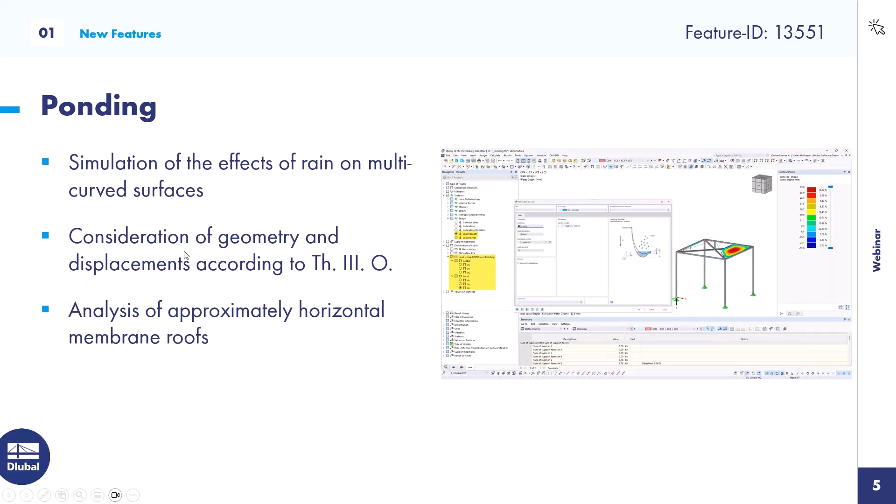It's of course an imaginary example. I did not pay a lot of attention to define the correct member hinges or the correct stiffnesses of this construct. It's a small tent, 3 by 3 meters, and it was standing in my garden.

I purchased something like this from a normal online seller. Since it's better to sit under it if it's raining, I let it stand in my garden. Unluckily this year there was a bigger storm and more rain. Once I came back from my weekend vacation traveling, I found that my tent was destroyed because there was a big water accumulation in my membrane due to the heavy rain and wind.

So it did accumulate. One bar bent horizontal because there was just weak stiffness. I'm currently trying to fix it, maybe next year I can use it again.

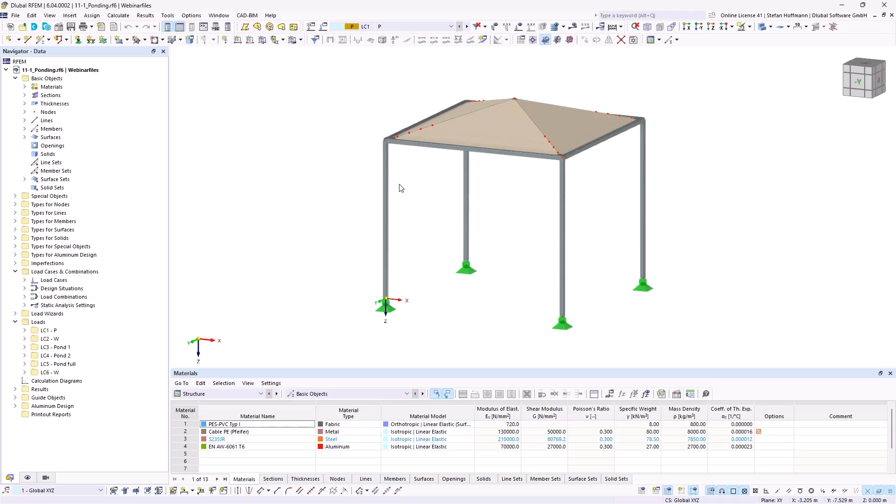So let me introduce you to my example. As told, it's just a small tent with aluminum profiles. Then we have a normal membrane put on the roof as triangles, so four triangles, and I summed them up as a surface set. You just have to mark them and combine them into a surface set, because this allows you to load it quite easily.

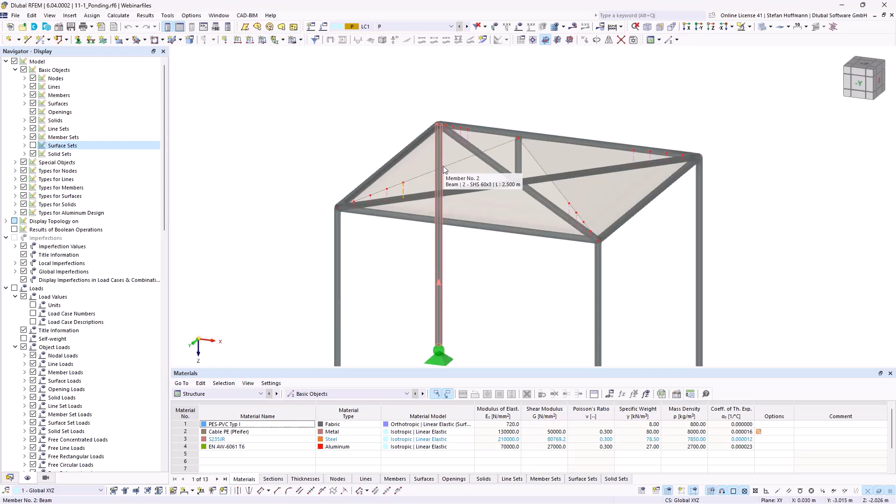If I make it a bit visible, you can see there's an inner cross in the plane and some columns over here where the membranes lay in. I tried to couple my membranes, as you can maybe see, with some rigid members, where I gave them some nonlinearity, because if elements are not connected with our FE mesh, there's no check if the membrane will deform below the member so that they touch and distribute forces into each other.

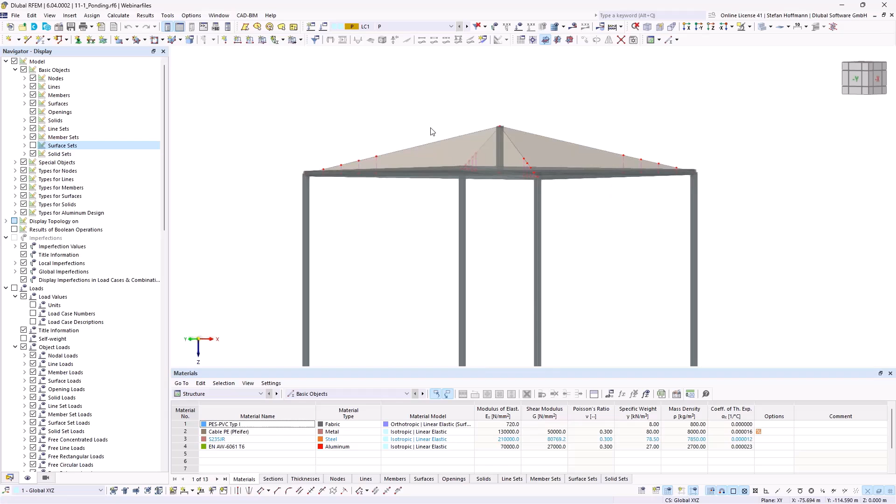I'm just putting a normal pre-stress on my membrane. I use the projection method because I want to reach such a tent shape, so I enter some imaginary values. They may not be practical values, but the pre-stress will not be that high, because usually you will also have some cables tensioning this small tent.

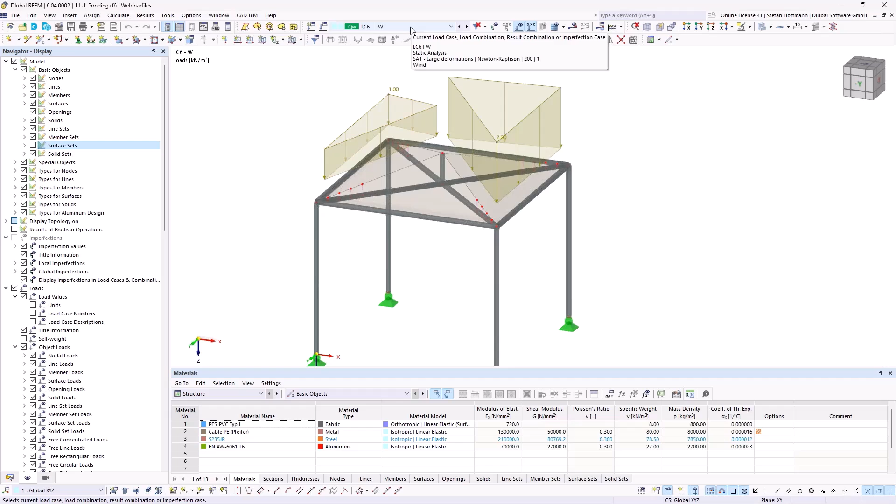And then I will load my tent once with such an imaginary wind load, so a high load on one side, a quarter on the other side, and also a high load on this side, and just a half normal pressure on my surface on this side. So that's the system, and then we now come to the feature load.

So it's a normal surface set or a normal surface load from the load type ponding. If you are searching for the load, just create some membrane structure or some normal structure, check out for a surface load, and then you will find the ponding load.

The ponding load allows you to define a specific weight of, let's call it material, or as you can see in the sketch, rain falling on your structure. You can choose that it will be filled fully if you do not define an amount of precipitation, or you can define an amount of precipitation.

Then the iterative calculation will stop once the defined amount has rained on the area. It is necessary to do a calculation of theory third order.

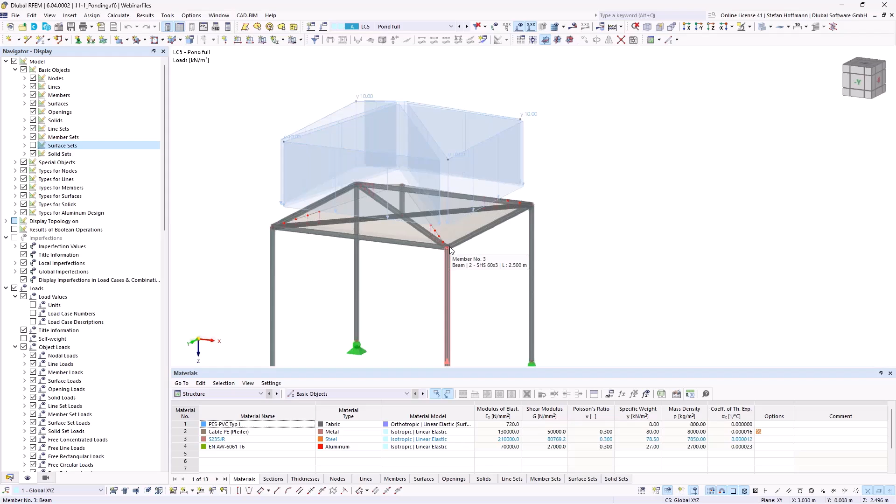So my first load case will be 1 millimeter per square meter, then the double amount, 2 millimeters. And then I would, of course, like to check what will happen if it is raining very much. This will be some state of equilibrium when the water fully fills my membrane, and then the water will flow down because the surface is fully filled with water, and there will be some low point where the water can drop down.

Okay, so I did sum up everything in load combinations. Maybe you are already used to our add-on, but it is now not the case that you have only one initial state, like in RFEM5, where you were able to define some form-finding shapes by defining loads and pre-stresses. You are now fully free in one RFEM file to check what different form-finding states may bring you in your structure. So for my example, in the first case, I want to pre-stress my membrane.

Also, as you can see in the load case with the activated dead load material, I did deactivate my rigid members because the shape should be found, and I expect that the membrane will not lay down on the members without these links, and later I will use these links. So I use my initial state, and I assign the pre-stress, of course, and wind load number 1. This is CO1, and in CO5, I use the other wind load. So CO1 and CO5 are my initial form-finding states, and then I load the states with the 1 millimeter, 2 millimeter, and full load. So the same for the other stuff, and I then considered my load combination as initial state.

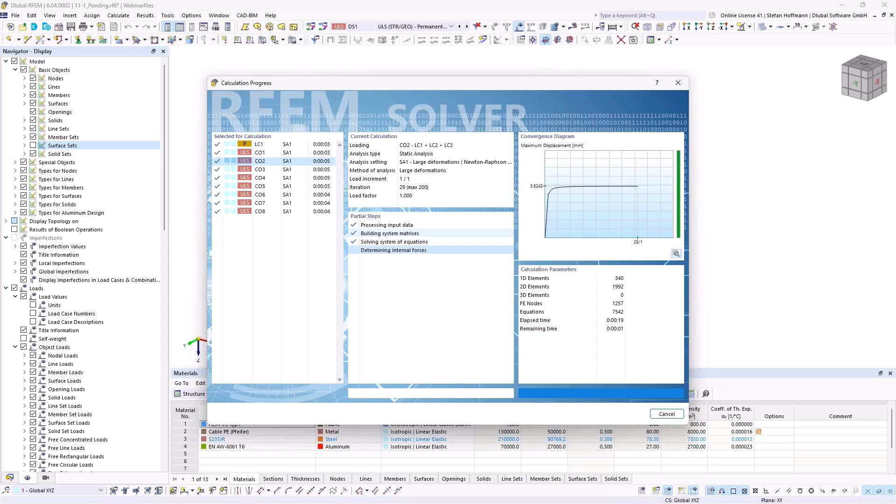So if I now calculate our design situation 1, which is most likely the new type of envelope, which sums up all our load combinations, you do not need to define an envelope by your own. It will start, of course, with our first initial state. Then it will load CO1 and 5 with our wind load additionally. And then it goes into the multi-core calculation because now the stiffness matrices are the same, and it will check up all the other combinations.

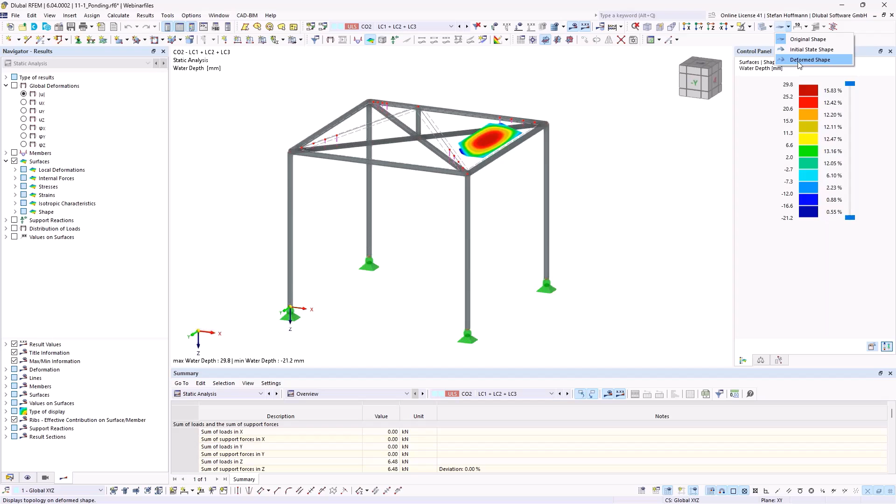So first, we want to check our wind load like this and the amount of rain like 1 millimeter. I will hide the forces. Then you can, of course, always think about which type of topology you want your structure to be shown. So I would like to have the deformed state. And of course, I would like to start with the initial state, where we do not have yet some raining. So I would just check for the contour lines.

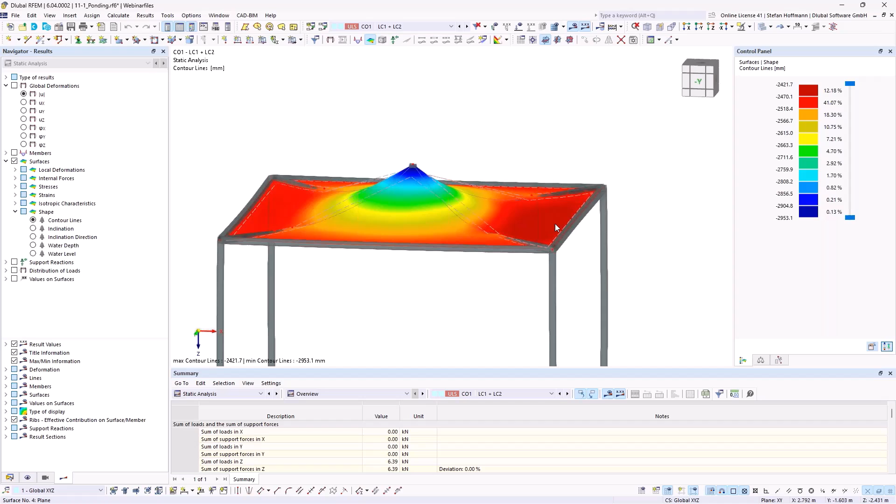So it's the pre-stress I put in my structure. And then there is the, let's call it, heavy vertical load. And as you can see, my membrane will, due to the effect that the load is higher than my pre-stress, bend down. And the highest point of my members is 2.50 meters, and my membrane will be like 8 centimeters below this point.

So this is most likely the lowest point, an available point for water to accumulate. So if now the rain comes on my structure, nothing really changes. But if you now check for our water depth or water level, you can see that there is some water accumulating. Let's check from minus y. So it's not fully filled because 1 millimeter will not fully fill the square meter we have. And you can as well, of course, inspect the forces.

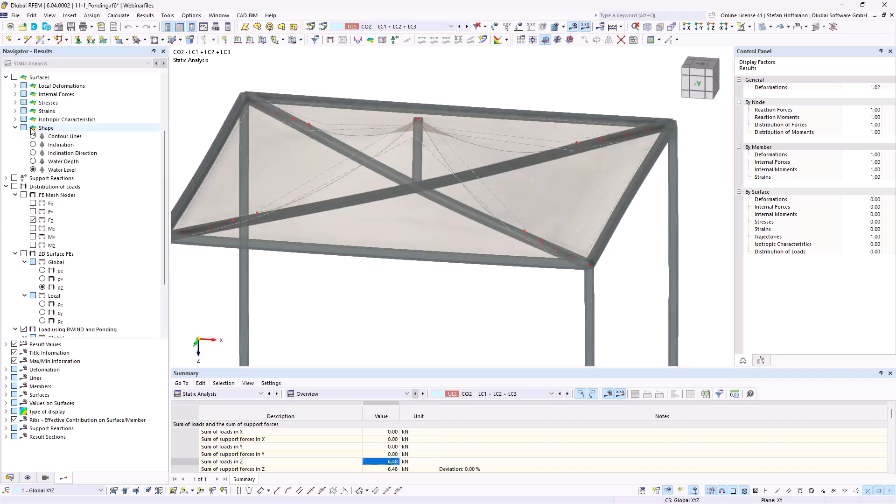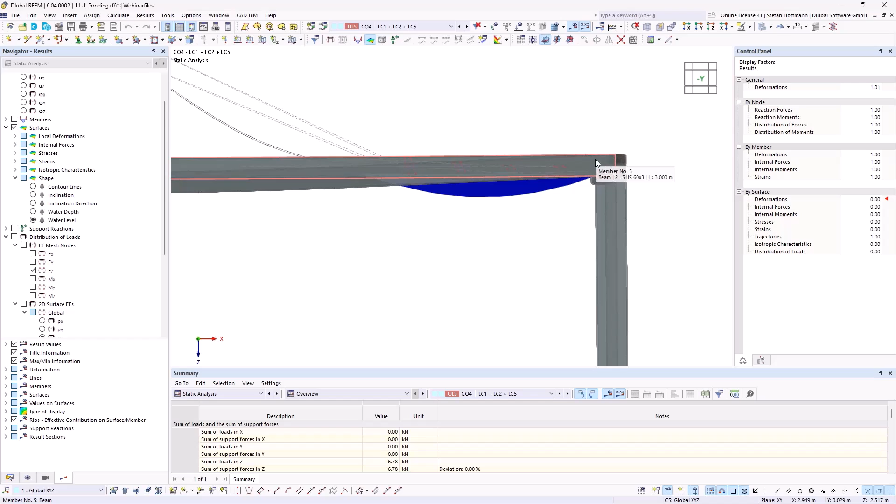As shortly shown, you can also check the distribution of loads and the ponding loads distributed on this area. So my water now flows into my surface set, and if I increase the precipitation, switching to the next combination, you can see that it will accumulate even more. And last but not least, it will even fully fill my hole, and I will then receive a final result. It will not influence the membrane with its stiffness and pre-stress more, because it will afterwards just drop down at the edge, as you can see over here, where the member is a 1D element, so it will not take into account the height of the member.

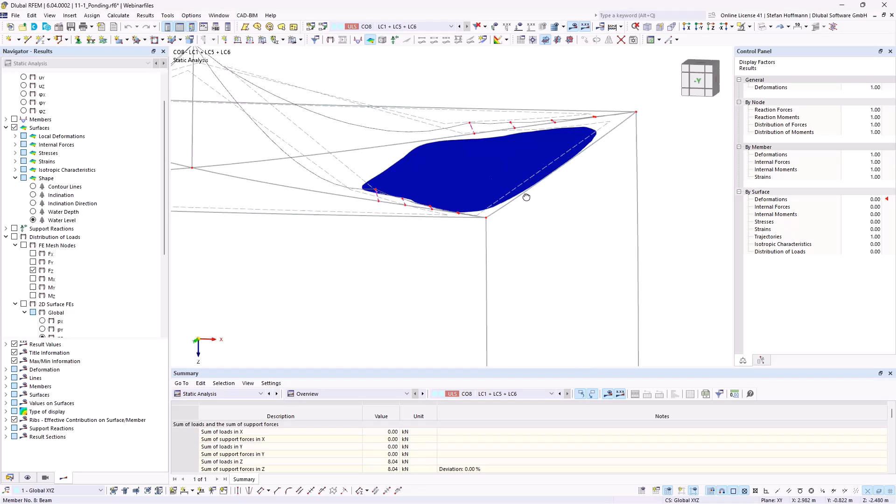That's not possible in a 1D, but it will now flow down, and this is then the state of equilibrium. So the same would go if I load a higher wind load on the left, so you can see it accumulates on one area and then on the next area. And last but not least, it will accumulate even more in two parts of my structure. So this way I could maybe check if the rain will affect my construction, and if it's weak enough, we can see that the members will bend like this, and well, my tent got destroyed because it was just weak in this direction, and now I need to fix it.

I do have a second, let's call it simpler file. So let's open the second file. It's as well, once again, a more imaginary structure. It's just a membrane which gets pre-stressed with its dead load in a horizontal way.

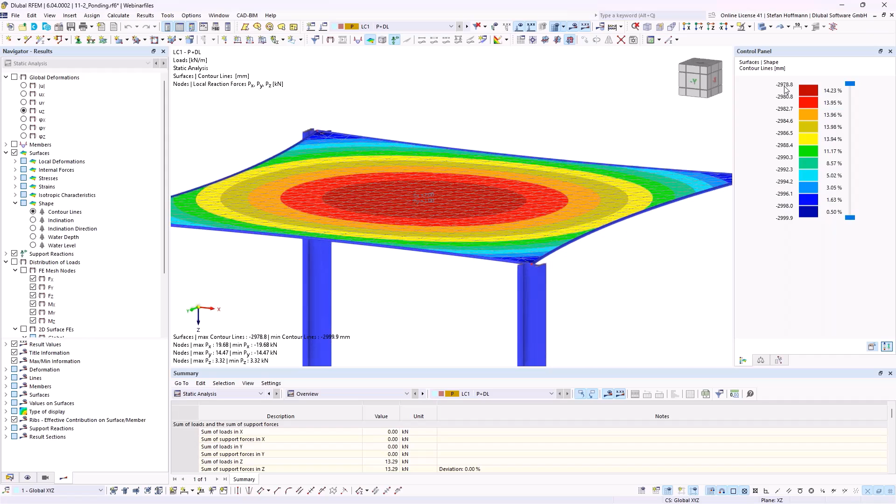Due to the minimum dead load, there will be some starting shape, which you can check with the contour lines. This is a 3-meter member height, and we have about 2 centimeters of deflection already into the Z direction. Now if it rains, I've chosen 1 times 10 millimeters, 50 and a bit more, so the full way. You can see it better because it's an easy structure to observe how the rain will fill your construction.

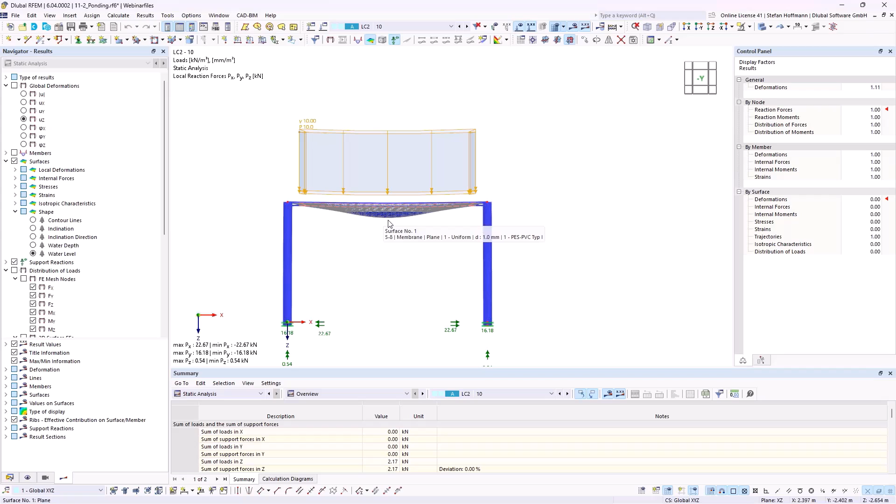If we check for 10 millimeters and the water depth, you can see this area is influenced. And if we check for the water level, you can see that compared to the initial state, the membrane will bend more because we now have the pre-stress brought into the system plus additional loads, and it will be filled. If we have higher ponding, it will be filled even more. And at maximum ponding, there is an equilibrium where, because it's an orthotropic membrane, we reach the lowest point where the rain will just drop down and fall off.

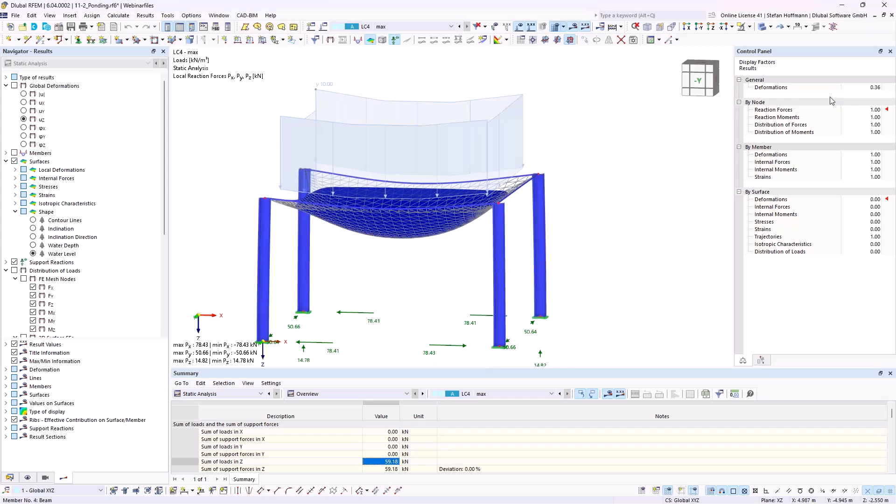Okay, so that's the ponding feature. I'll step to the next feature, which is currently only available in pre-release mode. This is for our internal testing, but pre-release means it's going to be published soon in Grandmaster. You can check for it in the extranet.

It's the surface load sag form-finding load, calculation method projection. Maybe you attended my latest webinar where we checked cushions. There we showed the surface load sag for the standard method, and now we've filled the gap and are also going to introduce the surface load sag for the projection method.

So the definition is sag, meaning you only have to define a ratio of your inner forces and a sag of a bending height. Then the iterative method will find the concerning equivalent pre-stress loads for the surface. It offers orthogonal or radial distribution.

And because projection is usually, as you've seen in my latest example, meant for a tent structure, this is now meant for simplistic shapes. Okay, let's jump into the pre-release. Remember, these files will not be able to be opened with the load type in your normal customer version because it's not yet released.

So we have 2 quite easy membrane structures because we only want to discover the acting of the membrane, and we don't care about the stiffness of the construction under it. On the left side, we have the normal standard calculation method sag definition. So to reintroduce you, it's once again a load type as a depending load.

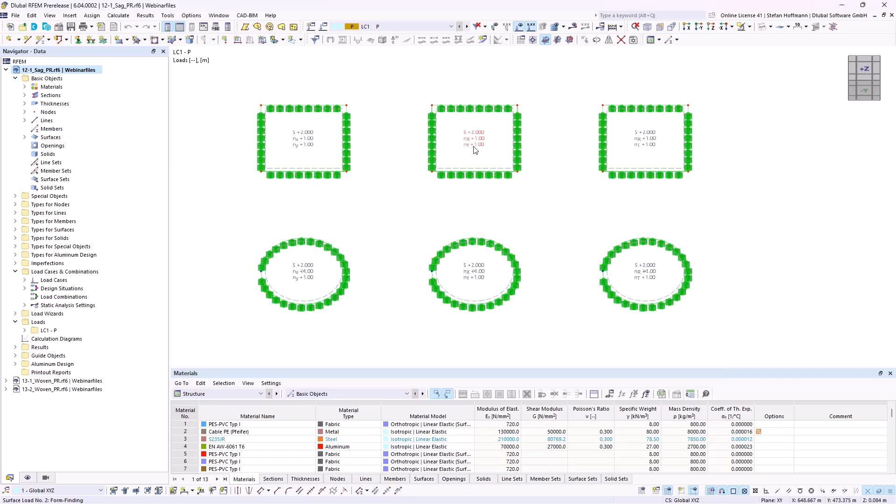And on the bottom, for the circle, I have the same definitions. In the middle, you can see the projection with the same input for the orthogonal load distribution, and on the right side, for the radial load distribution.

If we now run this pre-stress load case, it will do a large deformation analysis. It will iterate until we reach a certain point of convergence. If you hit this button, you can go into the static analysis settings and find the tab form finding, where you'll find information on how many iterations you want for this pre-stress, depending on the structure and what you want to reach. You can also affect the precision or tolerances for your calculation.

So if I don't show the results and just look at the mesh from the top - remember, the left is the standard and the right is the projection method - this is, I think, the easiest way to evaluate what both calculations will do to the membrane.

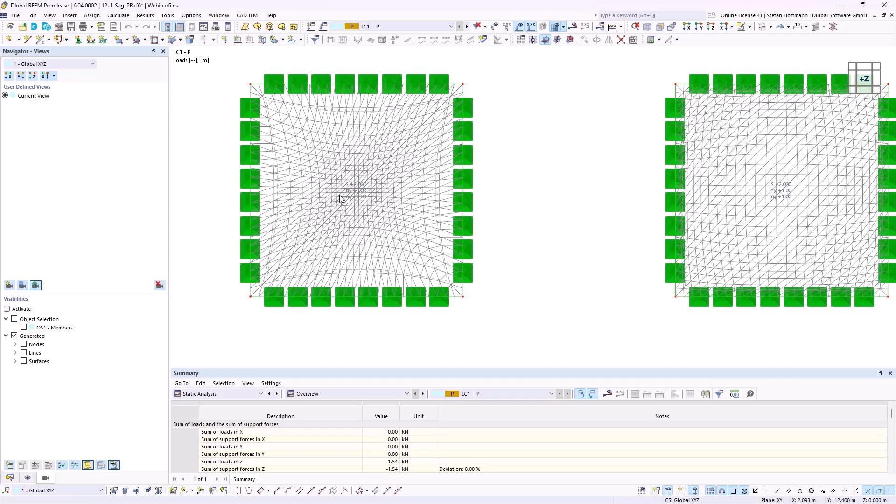You can see that in the standard sag, we have a fine mesh in the middle, from the deformation of the mesh elements caused by the calculation. For the projection load, we have a quite stable net. So it does something with our calculation.

If we check the shape, so the contour lines of the membrane, you can see they are most likely similar. We quite reached our goal of 2 meters - we now have 2 meters and 3 centimeters. We may still change the convergence to reach exactly 2 meters if we want, but this result is feasible for me.

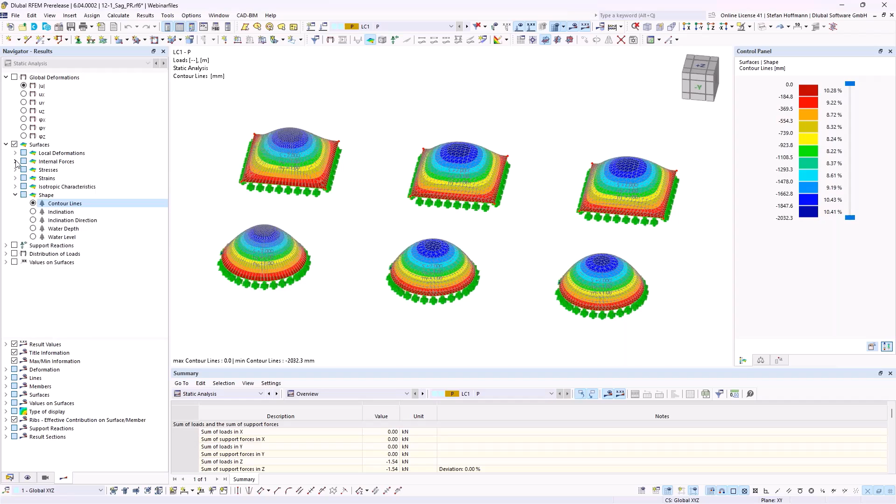We can see on the left and right that it's most likely a similar shape, though you can see we have a bigger circle with the standard method. But the easiest way to check is to look at the internal forces of the surface, so let's check for X and Y. This is the ratio the program will find for the pre-stress we put inside.

And if you check the principal internal forces, these alpha M values, this gives you the trajectories of how the forces will be applied to the structure. You can see this is a bit smoother distribution of the surface load. So it's most likely up to you which method you prefer to get your shape and the pre-stress into the structure.

Let's go on with the last feature for today. It's also still in pre-release mode - a new material model we are going to introduce to you: the orthotropic fabric nonlinear elastic surface material model. It's available for materials of the fabric type. Since it's nonlinear, it's going to require the nonlinear add-on later on. It offers the orthotropic nonlinear elastic behavior of your membrane material.

This is meant mainly for two weave patterns. If your membrane has a plain weave, symbolized like this due to the production process, this model is going to represent it with an element in the background, or if it's a basket weave like this, there's also a representing element model in the background.

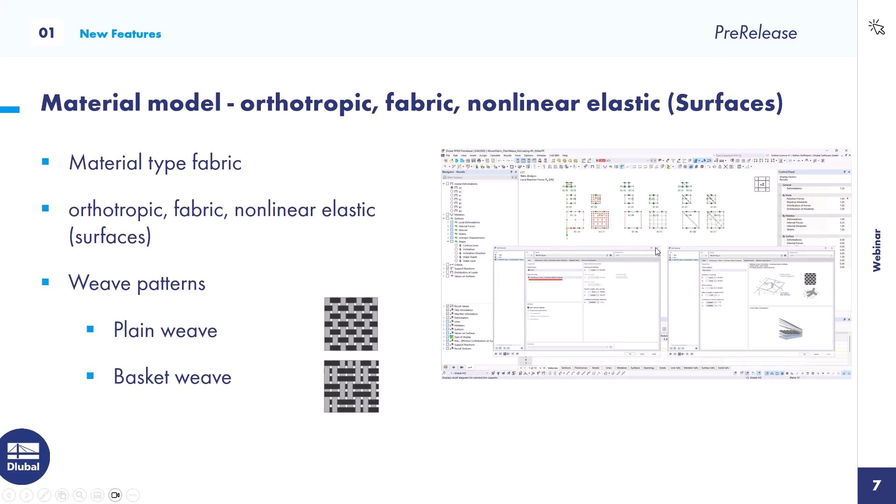Some more information on this material model: it is a microstructure-based material model, and in the background there is a representative volume element, as you can see in the sketch here. This is most likely modeled with inclined cables for the fibers due to the production process, since it is woven, and we have some vertical truss between those fibers.

If you also want to apply a 2D foil element as a coating, you will have the option to enter a shear modulus, as you can maybe see in the sketch. The sketches will be improved, of course, but it should be possible to introduce you to the model system.

So all you need to enter is, as always, the material properties for the orthotropic material. Then you only need to enter a ratio of the height to the length of the volume element. The height is the stitch between both fibers, and the length is one element - essentially one part of the weave.

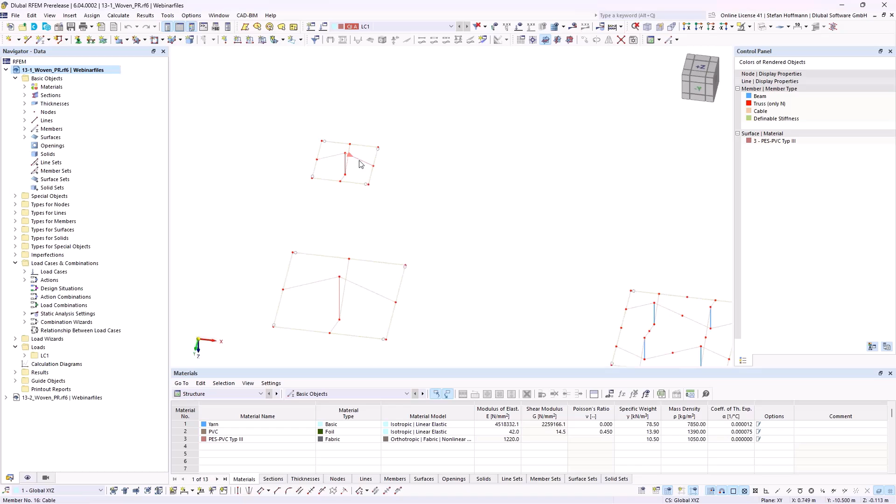Okay, let's step into the program and see some colored model shapes. First I want to show you this file made by our developers. On the left side is the RVE, the representative volume element, with cables, truss, and a coating if necessary - meant for different FE mesh sizes and also for the weave pattern we have.

Now you would go into your membrane, which is easier to define than defining such an element. You go into the material definition, into our library, choose a fabric material type, and once it is released you will be able to define an orthotropic fabric nonlinear elastic material model. If you don't care, you can uncheck the user-defined material and the preset is taken in the background - a coating and a ratio of the height - or you use your known material, which should usually be the case with a membrane material.

Then you will check the user-defined material, and you will be able to manipulate the E-modulus. You can define a coating if you want, and you can define a ratio for this.

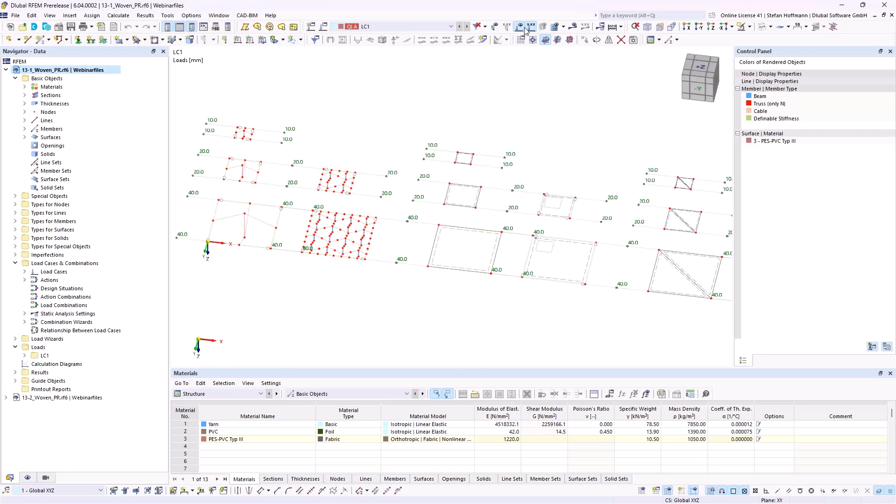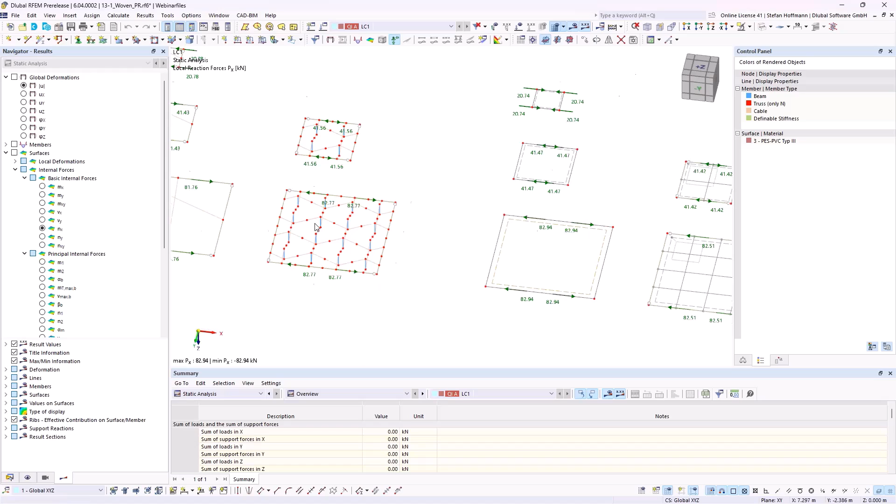So this one is an example to test if we now have support for movement, what results can be achieved with the nonlinear material model compared to the element in the background. It will not fully match, depending on the type of convergence where you set your equilibrium, but you can see in the support forces we are close to reasonable results, what we would expect by simulating such a weave pattern with such a member material model, or with our upcoming nonlinear material model.

Let's show you this on a simple membrane structure. I think the structure is already known if you attended a webinar of ours. It looks like a paper plane, supported by cables on the edge and nodal supports. Then there is a prestress we apply, just a normal symmetric prestress into local X and Y direction with the standard method, nothing special.

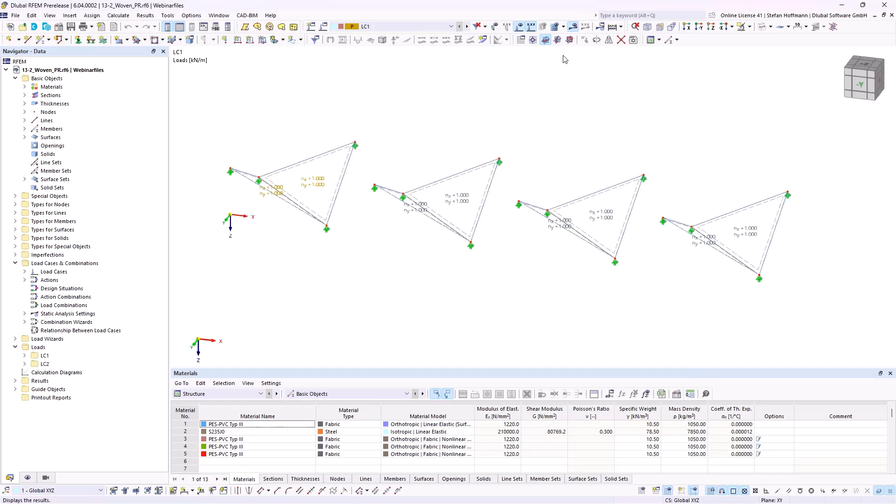We want to load it with a vertical load, because doing the prestress, the form finding for the structure, we most likely define the shape we want to reach with our inner forces. So the material properties will not play a big role, and we will receive a contour shape which is similar, even if we use different material models.

That's the point I have to tell you. So the left one is using the normal linear elastic material model for the membranes, and I have defined 3 different types. The next one is using nonlinear elastic, where I have defined the shear modulus to be the same as my linear one. If I check it, it's the same shear modulus.

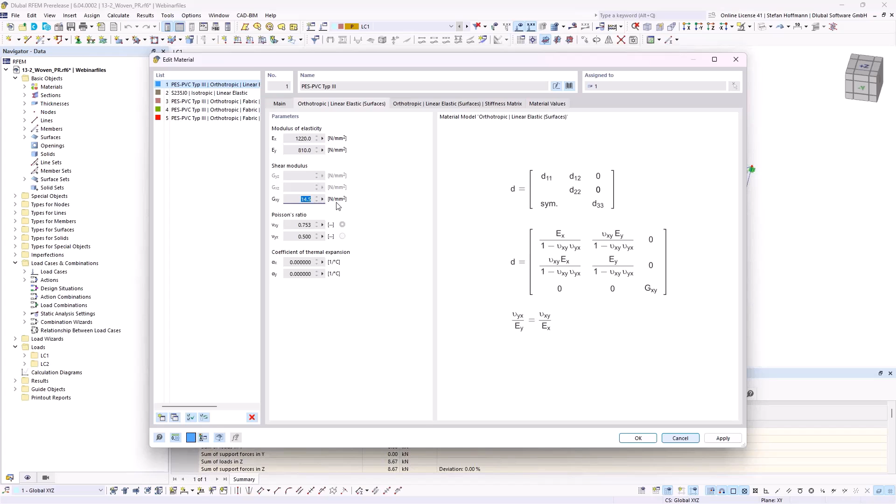Then I have defined one material model where I got rid of the coating, most likely - you can enter 0 here. And the last one will have an increased shear modulus, so a coating which is bigger or has a bigger influence on your fiber structure.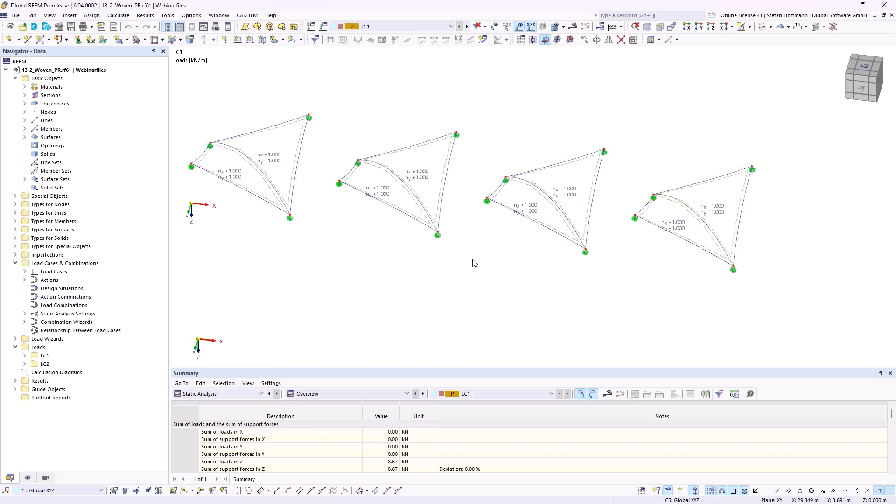But still, as told, we receive the same results for our form finding process because the boundary conditions are the same. And due to the fact that we define the prestress, we will receive the same shape in this state.

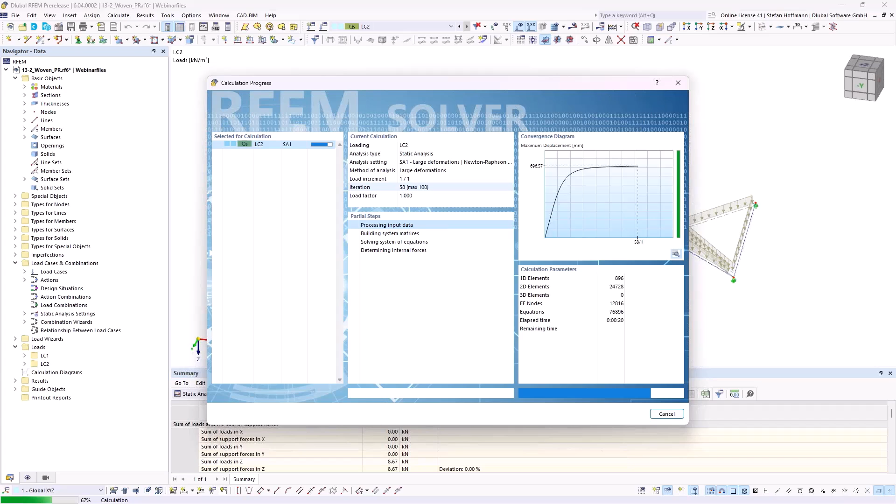If we now apply a load to our form-found structure, all the material properties and boundary conditions come into play. Even if you now would have members, the stiffness of the system will be given more attention than in the form finding process. Also the prestress will maybe redistribute if you use some form finding supports - I will show you soon how they are used. We will now see different results.

So we can directly see it. Maybe if we move it like this, let's do it with the cube. If we check our view from this angle, we can see this is our linear one, and then going to nonlinear, the deformation will already differ.

Since we have a quite high membrane, this is not the easiest way to elaborate, so let's check the inner forces of our membrane. We can see that the definition of the material will have a certain outcome for the inner surface forces, as well as for our boundary conditions.

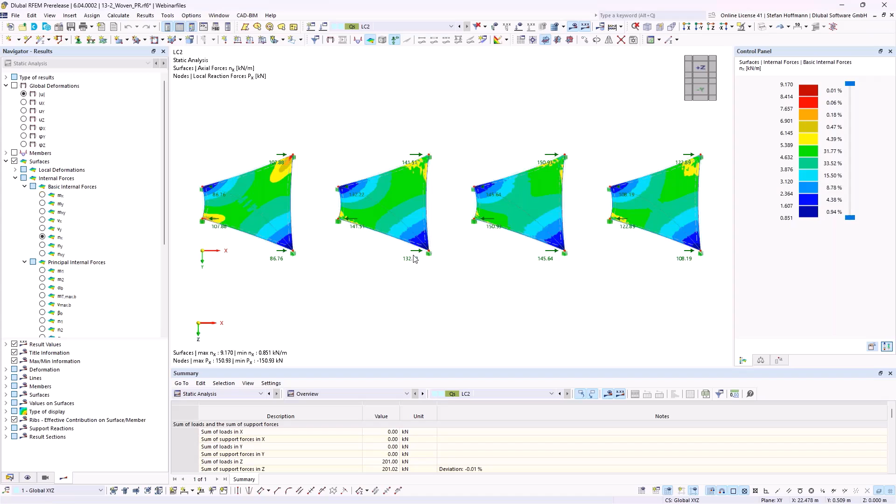Okay, so I will just close this one, and I will now come to the second part of my presentation. I would like to show you some certain examples of what I was thinking of.

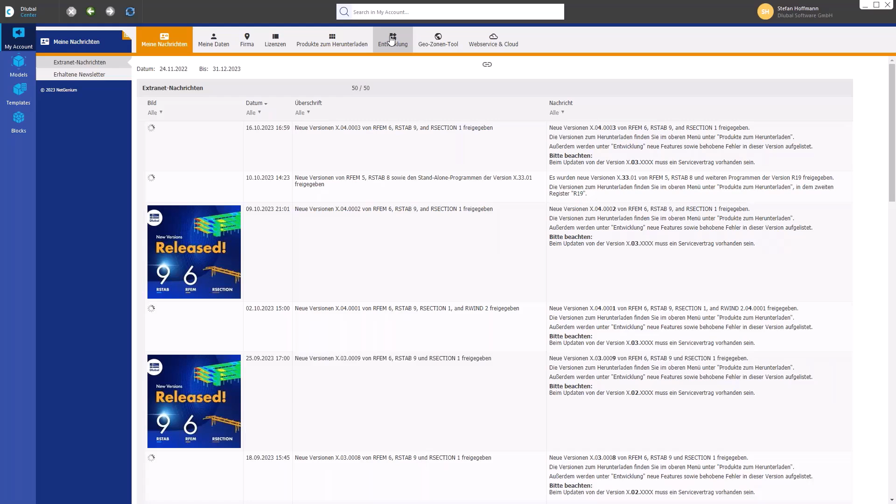I will start first with an easy cable. So I'm going to the Dlubal Center, and as you can see, if you already used the project manager in RFEM 5, you can quite easily filter your projects like this, which are on the normal local storage. You can also enter your account. Let me quickly show this and check - well, it's now the German interface because my account is a German account. Go into the development section, and this is the place where you can find features and also bugs if they are corrected. I will now load my next file.

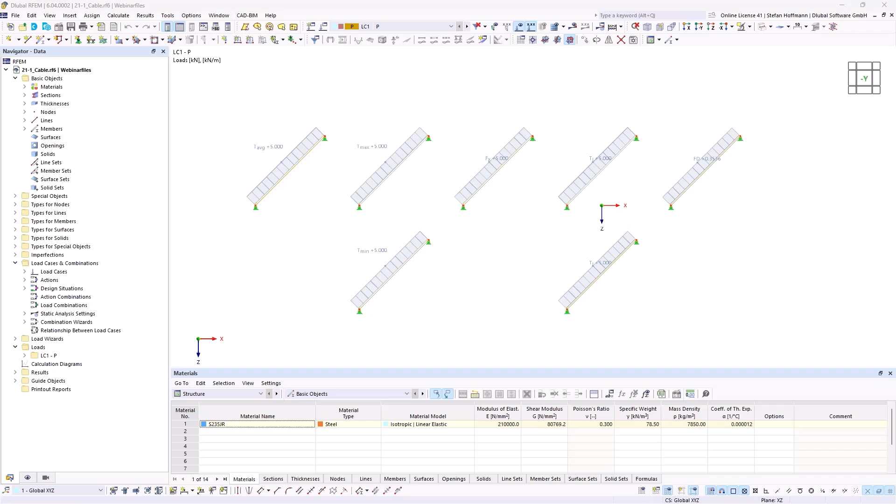This is called cable, where I would like to introduce you to our cable loads. So I will just run the file once. It's the same cable, 7 times with a 45-degree angle cable, so 10 meters times 10 meters, which is 14.1 meters. Then if we go into our load definition, as told for the surface loads, it's not now a setting of a surface or a setting of the member - it is a load you can assign as a member load.

The load type then needs to be chosen as form finding, and then you will be offered two definition types. You are able to define a geometric force or load, where you can see what is then going to be put into the calculation in order to reach your pre-stress or normal force of the cable. Today I would like to show you our force loads, and I'll try with this example to help you understand the differences.

The average force in members is, I think, quite easy. The form finding calculation tries to find an equilibrium for the cable with the deformation so that 5 kilonewton will be reached. So we now have a bit of bending, which of course depends on how high you set the precision in the static analysis settings. We will have 5 kilonewton in here, a bit lower and a bit higher, but all in all, if you sum it up, it should average out to 5 kilonewton.

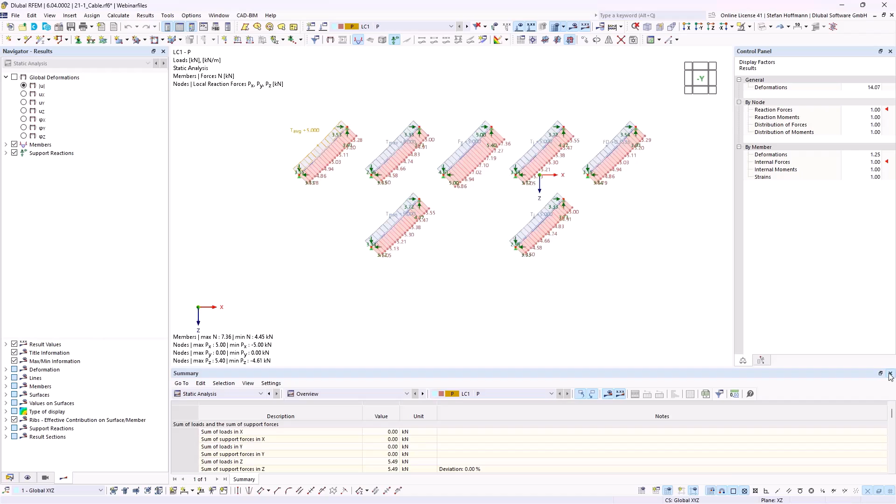Let me close the table and show a second window underneath where you can directly inspect the deformation. The deformation, of course, will change depending on which load type we introduce into our cable. This is the left one, the normal force, and we will have such a deformation. We can also check for the bending into the global z-axis to investigate, but I think the vector is a bit better here.

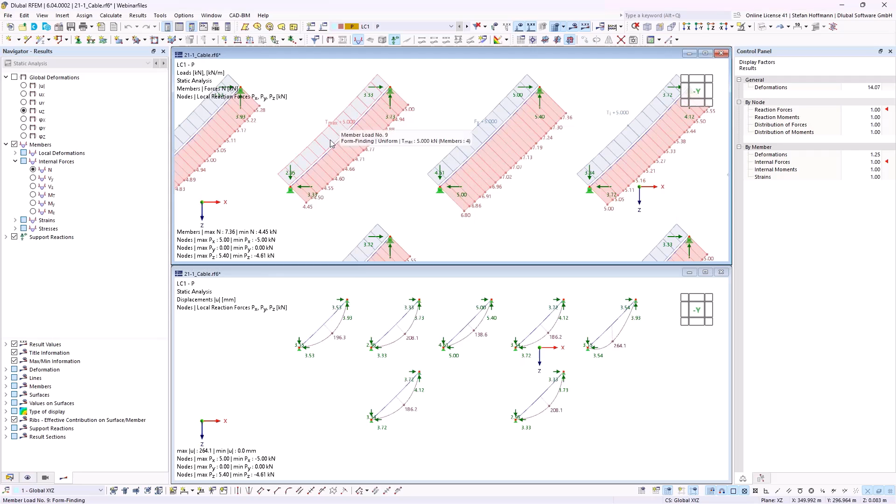The next load is the maximum force in the member, or even the minimum force in the member, which is trying to be reached. I kept the 5 kilonewton, and in the upper one you can see that we will reach 5 at the top, because that's the maximum we'd like to allow for the cable, with a lower part at the bottom. The lower one is set to allow the program to find a pre-stress with a minimum of 5 kilonewton, so it's going to have 5 at the bottom, where the lowest point is in this file, and a bit more at the high point. Depending on what purpose you'd like to introduce, this load type achieves these results and has an influence on the results.

So we have overall a higher normal force on the lower one, so the deformation should also be a bit less.

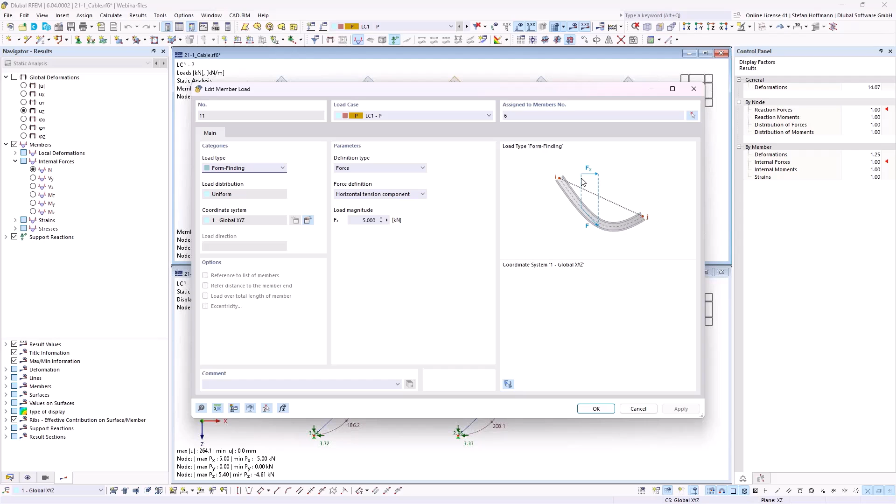The next one lets you define a horizontal tension component, which is then redistributed to the local force, the normal force. Due to the fact that we have 45 degrees, we expect something around 7, and as you can see, it's reaching something about 7 - the pre-stress is higher than 5. Let's check quickly for the deformation - we have a lower deformation than in the other file. It's like the way you introduce the pretension into your cable: you don't have to think about what normal force can be reached in the cable, you can simply add the X component and let the program do the rest for you.

The next load is the tension at the i and j end. i refers to the start of the cable, and J is the end. You can hover over your member and see a small arrow - my members or cables are going from bottom to top, so this is the start and this is the end. I'm now trying to define 5 kilonewton at my start in the top picture, and 5 at the end in the right one. Most likely, if you remember, we can see 5 at the top and close to 5 at the bottom - it's the vice versa of this load in our example, which is also shown in the deformation. It's most likely vice versa, and we will get the normal force in the member.

We will now quickly skip the minimum, because I will show you this one on the next model. Due to convergence reasons, if we model everything in one file, it may influence the convergence of our form finding for separate part systems.

The last one in this model is the force density. For this, you can see that there's a load with a yellow arrow pointed out. If I check into my edit formula, I can see that I have typed something like 5,000 divided by ml, which gives me this result. This means that by the formulas, they are meant to be in SI units.

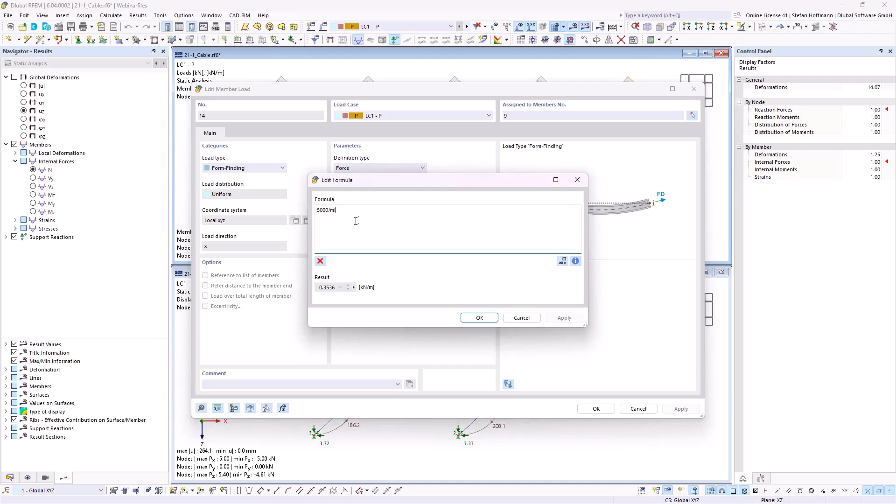So if I want to introduce 5 kilonewtons, I would have to enter 5,000 newtons, and I divide it by ml. ml is a parameter I have set.

If you click into the global parameters tab, maybe also already known to you, I now use here a formula in order to determine the length, so the unstressed length of my member without doing anything to it, which is 14.14 meters. Of course, you can calculate it yourself, but if you change the length, it will do the work for you and you don't have to think about it.

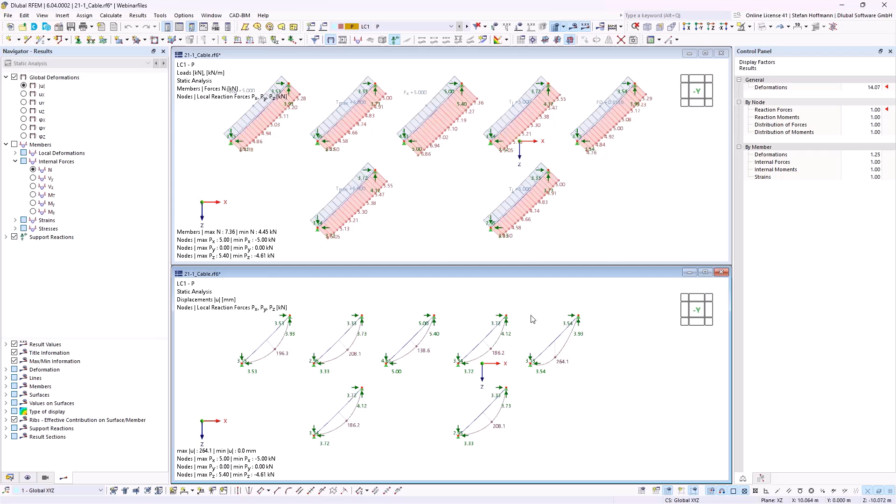And this leads the force density to be like this, so 0.35 kilonewton per meter. And this should be somewhere close to my 5 kilonewton I give there in the average inside. You can see the deformation behaves a bit different to the left file, but this depends on what you want to achieve.

So let's close this file and go into the other cable file where I want to show you the minimum force gathering for your cable.

On the left side, I have defined a form. You can get rid of this load magnitude. We will improve this in a future version because the minimum tension is doing like an optimization, so it's really looking for the minimum tension at the start. There's no starting value you need to enter over here. And the minimum tension at the end is looking for a minimum tension at the end for this cable having its inclination. So it's not 45 degrees, it's now 22.5 degrees.

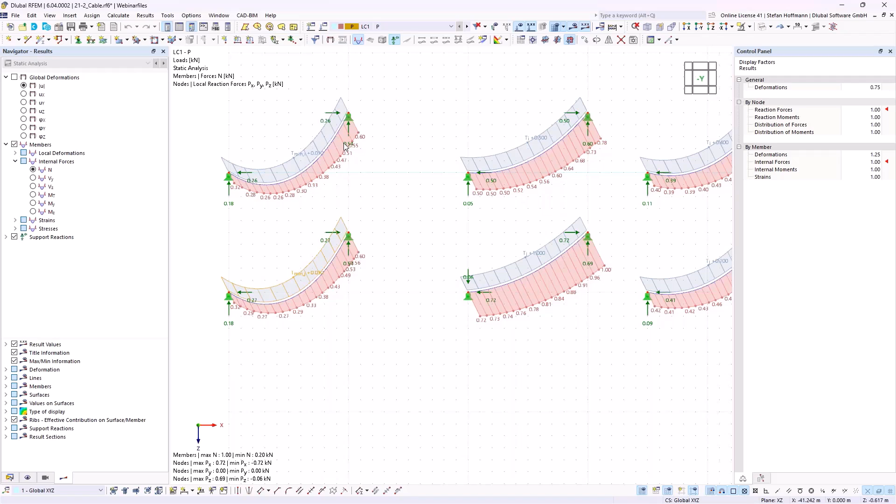And if you run the calculation, you will get an inner force distribution for your cable, which is like this. So it is similar for both, because I'm looking for the minimum force at the start on this file and here for the end at this file.

And this is most likely like, switch off the grid, going or searching with the functions of the force definition for tension at the i end. So we will most likely iterate internally. So this is a stable construction.

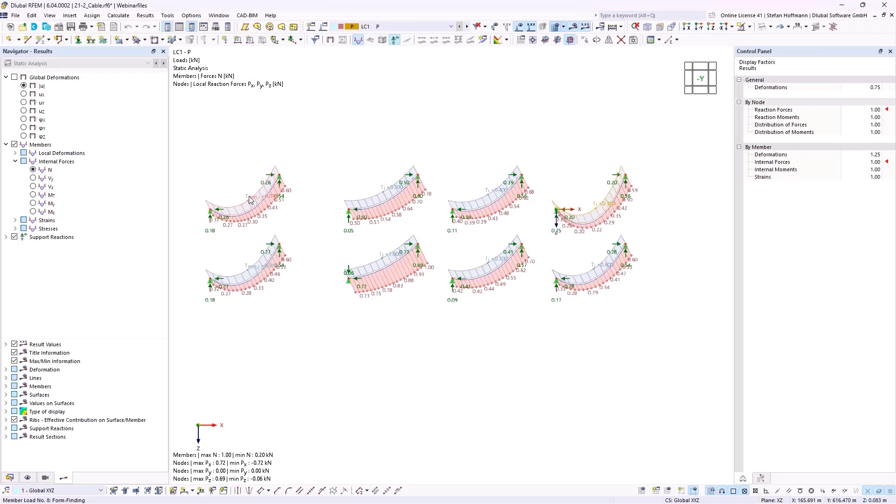We can have it less, this is also stable, this is also stable. And if I would lower it even more, then my structure will become numerically unstable or nonsense, and inner forces will arrive. This is what this function is doing internally, so it's a minimum force definition to reach a certain convergence or equilibrium.

Of course, the dead load is activated for both models. So I did not model a lot yet.

So let's go now to 3D models where I would at least show you how you can model something quite quickly at one example file. I will open now, I have to search it for the name, of course, my next file.

The structure is already known to you, so it's our paper plane. Let's call it like this, with this time a column at the edge and some cables. And I want now to start to model this structure and show you how quickly you can do it.

So of course, if you want to start with the form finding, please enable the form finding add-on. And well, then you can also define material sections and so on. So I will not show it this time.

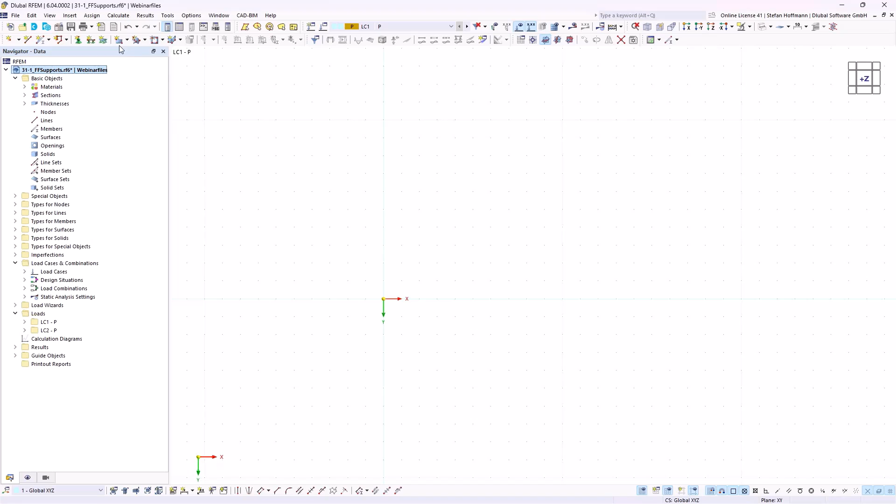So I would now start to define a normal rectangular plane as membrane with membrane material, which is having a thickness of 1 millimeter. So I simply draw a 10 times 10 meter rectangle.

I would just cut it by half in order to draw a line, and then I will divide the surface by intersecting lines. Due to the fact that it's usually better to define a grid for your surface, I double click on both surfaces, assign specific axis, and I rotate one axis parallel to a line. So I would like to have my local y-axis of the surface pointing in the direction of this bottom line.

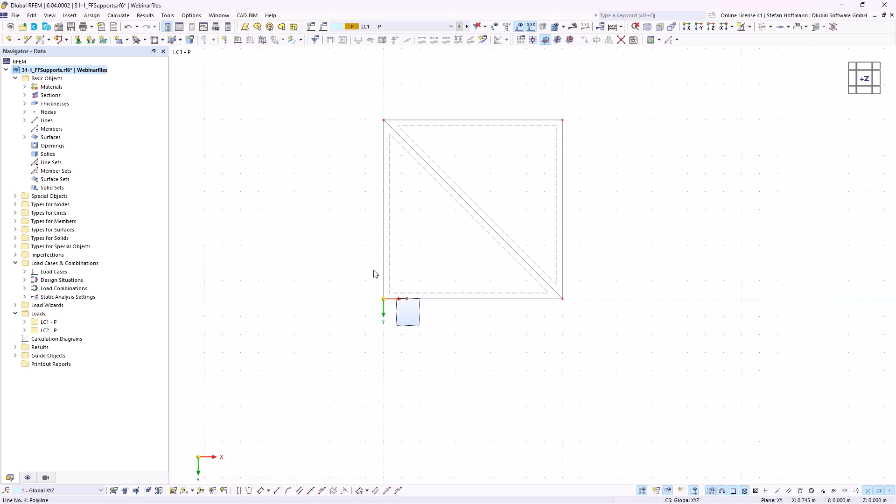Okay, I now want my edges of the membranes, because they cannot be free edges. Otherwise, the membrane will, if you pre-stress it, be quite weak in this direction. We always need an edge member, which will be a cable in our case.

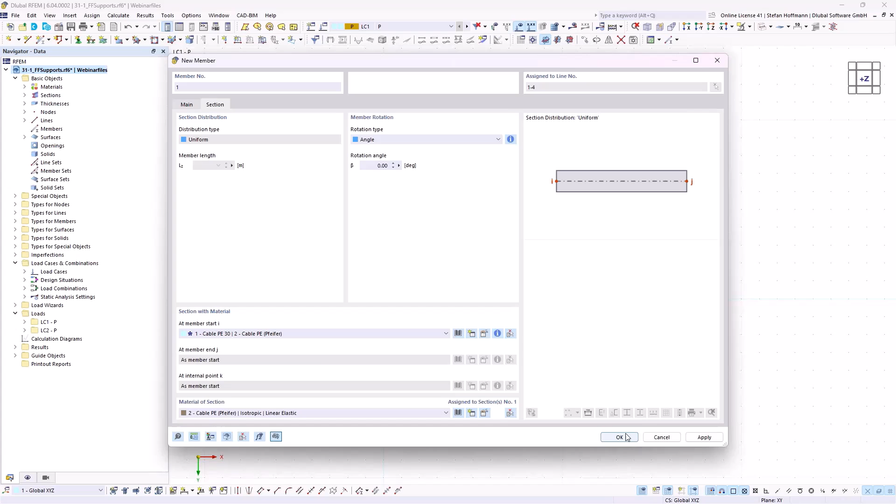And I would just use a defined cable where you can quickly check the material properties of the cable. So I assign it at the edges. And then, well, it's a flat membrane, so I can just mark both nodes, double click on them and move them 5 meters into the height. All other connected elements will, of course, then be manipulated, making it quite easy for you.

And then I will draw some columns. They will be, in my case, truss limited to only N members.

So if you are curious and do not know what all these member types are about, just hit F1 on the keyboard. Then usually the browser will open and guide you directly into the member online manual. You can look up truss only N and see that this truss type has only a stiffness E times A, and is only able to absorb normal forces. So you don't have to know everything, you can just quickly go into the manual.

For this, we will use our aluminum profile, just like from my tent I showed at the start. So we will now draw this column in over there, and copy paste it by keeping the control key on the keyboard, copying it to this node.

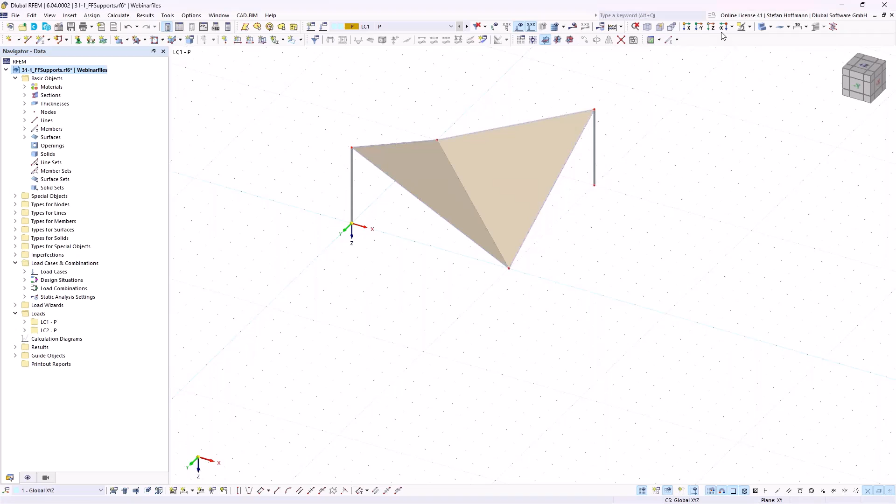We will now define some of our cables. You can hit the new member button, and maybe you don't know yet, but you can also select object properties in the graphics. So if we don't want our column, but want the cable definition we already set for this cable, we just click the cable and everything is assigned to this member. I want to draw it 5 meters across, from there to there.

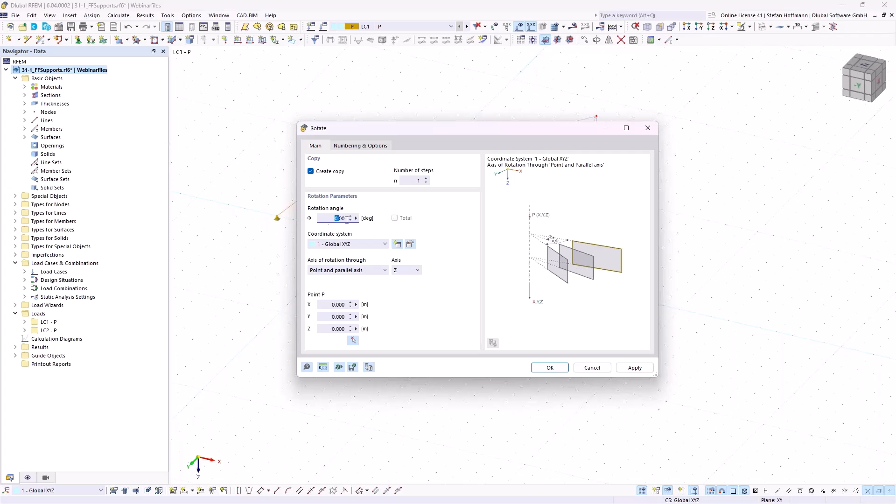And then I want to support it over here with a nodal support. Then I just go over, mark both my cables, and rotate them as a copy by 180 degrees. I will choose a point - luckily I have a middle point over there - and I hit OK, and then it's rotated. I just quickly add a support over here as well.

Last but not least, I would like to consider form finding supports. For this, I would simply add some XY supports without any non-linearity type over there, because, as you may already know, it's not a non-linearity type anymore to add form finding supports, but I will show you how you can define them.

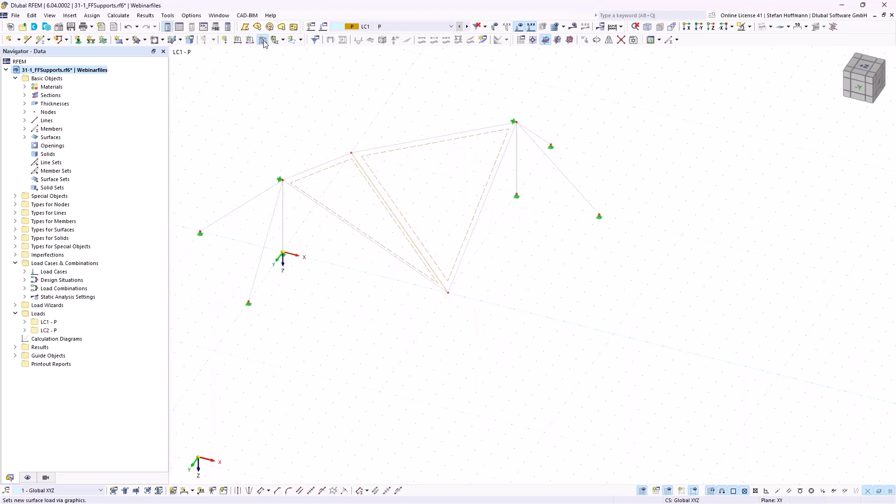Last but not least, we are going to simply insert a form finding pre-stress of 1 kilonewton as a standard load definition for our construction.

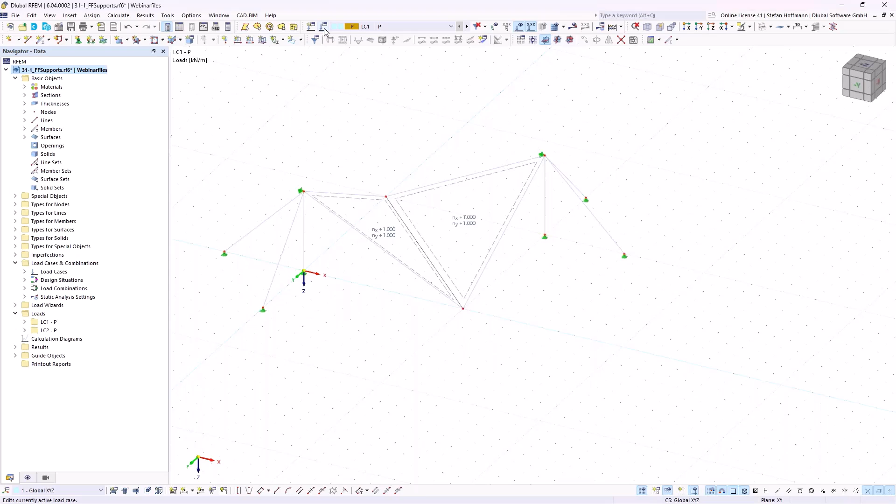So if we now would like to check how the construction will behave, whether the supports act or not in this case, the key is to go into a load case. You can see it's already created because I did not delete everything.

You can now define a structure modification. So we would go into a new structure modification, and there I would be able to deactivate objects. I am now able to deactivate supports, for example, on nodes. Keep in mind, it's meant to be on nodes.

So I will now create a new object selection where I can define that I want to have nodes in this object selection, with the definition node number equal to these both nodes, so 1 and 3. Okay, and I now consider this structure modification.

So for the program, this is like the last concept of RFEM 5. These supports will not act in this case - they are not form finding supports, so they are not there. But you can use such a structure modification later on by combining it into a combination, in order to disable the supports.

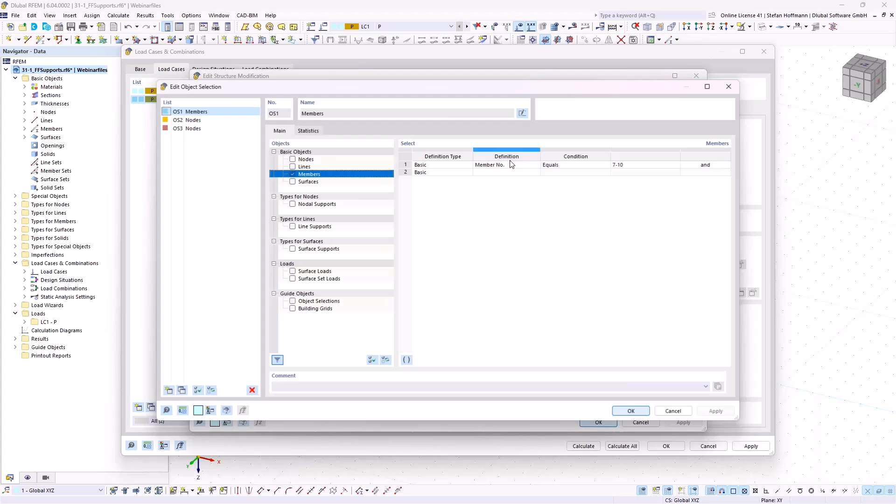For the other pre-stress, which will then be similar, let me quickly delete this because I will copy my load case. I already find a different structure modification where I will deactivate members, and my deactivated members should be my cables. Okay, so if we now calculate all...

Of course, yes, the load combination 2, we can get rid of them. Let's calculate all once again.

We should now find two shapes - one where the nodal supports are deactivated in our load case 1, and in the second, our cables are deactivated. Maybe if you're used to something like this, it doesn't make much sense to deactivate cables, because the nodal support has quite higher stiffness. But well, to be correct, we can check it without the cables.

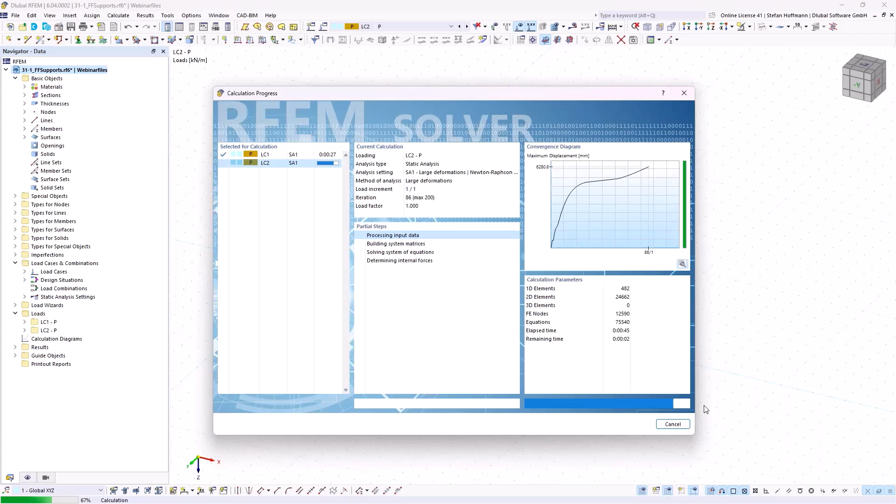So depending on how fine you would like to achieve results, the program is going to calculate. Maybe I did something wrong this time because it's not working as expected. Of course, well, I have to set some nodal supports at this edge. Otherwise, the deformation will look quite interesting if I do not set nodal supports at these edges.

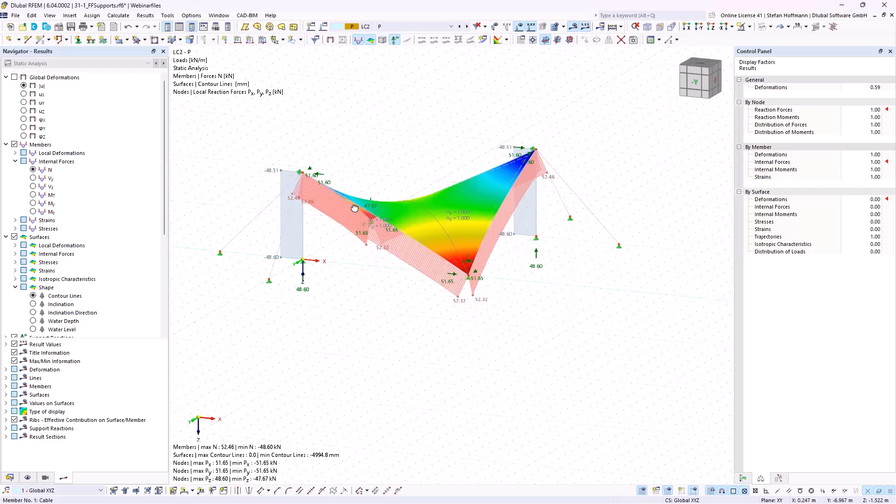Yeah, this is what I would like to achieve. So we can now once again check the contour line, and we can of course see that in our second file where we deactivated the members, the full force should go into this side.

Did it converge? We have to calculate, of course, now load case 1, where we then deactivate the nodal supports, and all this the force should go directly into the cables. We would see a similar shape, but now you can see that the force is going into the cables.

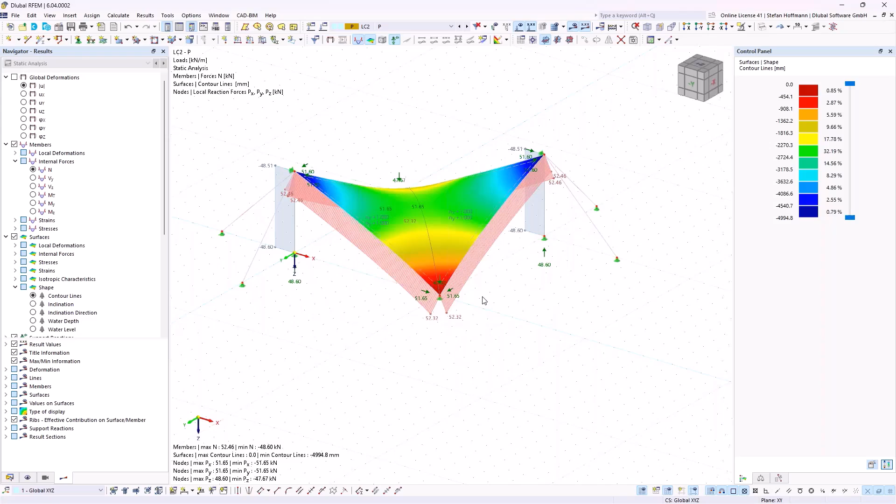So it's depending on what you would like to achieve and how your form finding structure is going to be built. You can use these tools in order to inspect your shape. So let's jump into the next example.

You can, of course, leave the toolbar center open and not close it, depending on how many files you have. So this is a cable net I would like to show you now. It's not that hard to introduce, so let's have a look at it.

It's a cable net, 10 times 10 meters once again, and then I have some cables going through it, split by 10 times in this direction and 5 times in this direction, and then I applied an angle of 20.25 degrees.

What I would like to show you in this file is that my cables are split, so it's quite hard sometimes to apply now a useful form finding load on them.

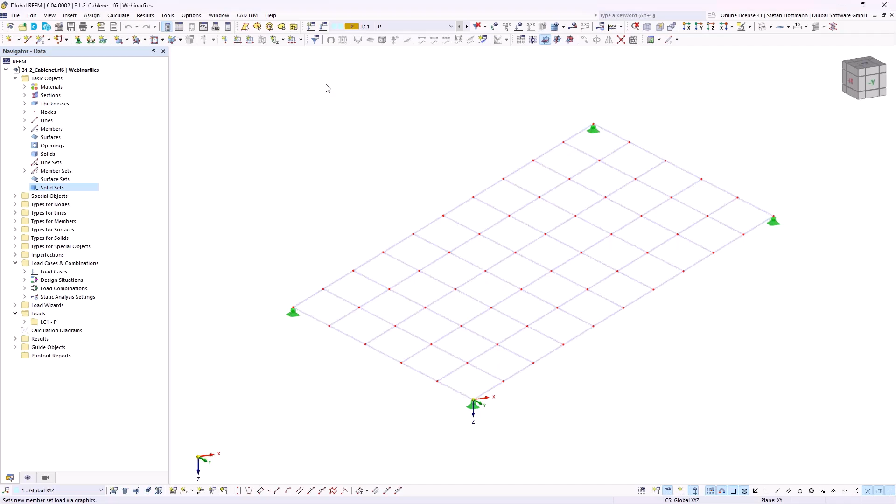But maybe you already heard about member sets, which you should know from RFEM5, but you can also use them for our form finding structure, like surface sets and solid sets, because they're now not only used to design a split member as one member in add-ons. No, you can now also define so-called member set loads.

So they contain most likely all the definition types that a member load is able to do. So you can now define member set loads. In order to do this for our file, you could of course now single choose these members or these cables, hold the control key, and do the tedious thing of marking everything one after another.

Or you now go into our visibility tab, the view tab, and you can define object selections. It's like the last thing we used for structure modifications. You can now easily, according to the older option in RFEM5, edit select special.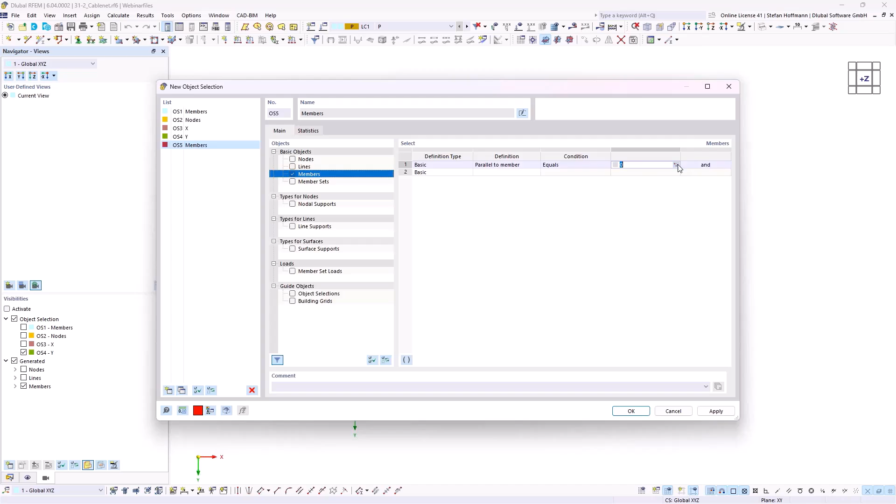This was most likely moved into this tab where it makes more sense, I think, where you can now choose that we would like to select every member that is parallel to a member. And now we want to have all members which are parallel to this member.

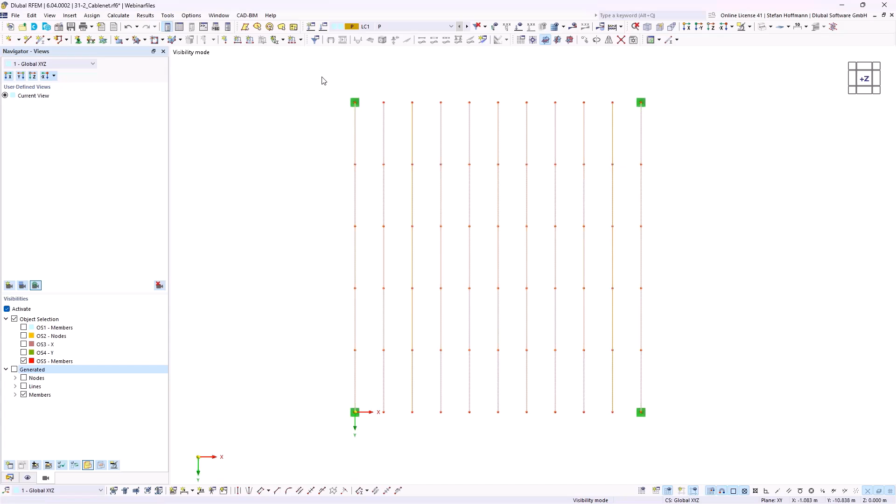If we check the statistics tab, you can already see the yellow highlighted members that will be chosen. If we hit OK, and we now only display this visibility, you can see that we now get a quicker influence into our members and object selection, and we can mark everything, right-click on them, choose members, and create member sets.

You can see that the program is intelligent enough that it will not combine these split members, but it will combine such a row into one member set. The same can also be done, of course, for other members.

So let's do a new one where we want to have the members parallel to the other members. You can, of course, then cancel the visibility and choose this one. And then we can see in the statistics that only these members will be caught.

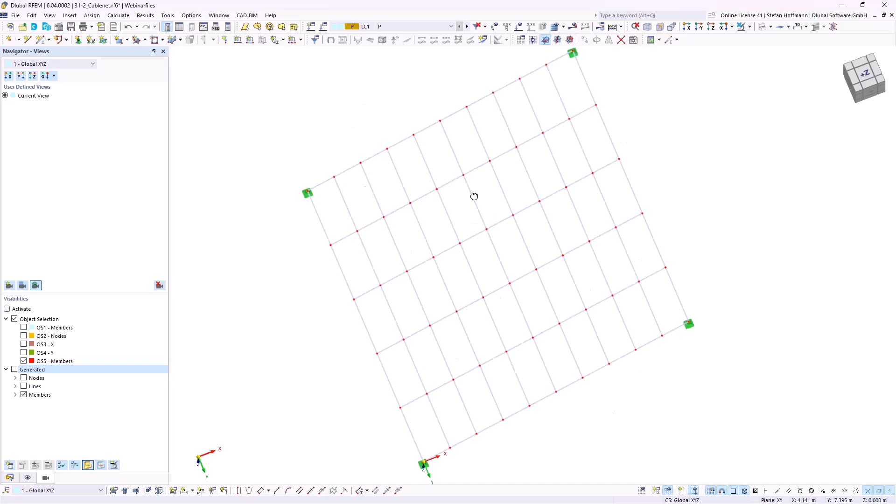So by doing this, we are able to define member set loads. And I have now defined them this way, that I have a geometric member set load for 101% of relative member length for my rectangle.

And in the inner member forces, I have chosen 2 kilonewton into this direction, and into the Y direction I have chosen 1. So remember, if you want to compare different pre-stresses in one file, you just simply have to copy this load case, for example.

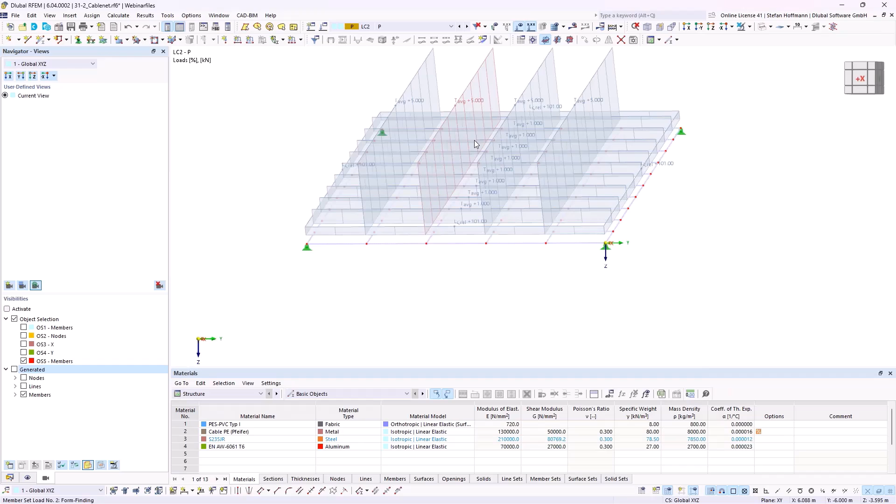Then you can activate the table, or also just mark multiple forces over here in order to go in and quickly change it from 2 to 5. That's most likely all that has to be done.

You can now hit calculate, and then you can control, once again, the load combination is empty. That's funny today. Okay, you can calculate then your both form finding shapes. So the load combinations do not like me today.

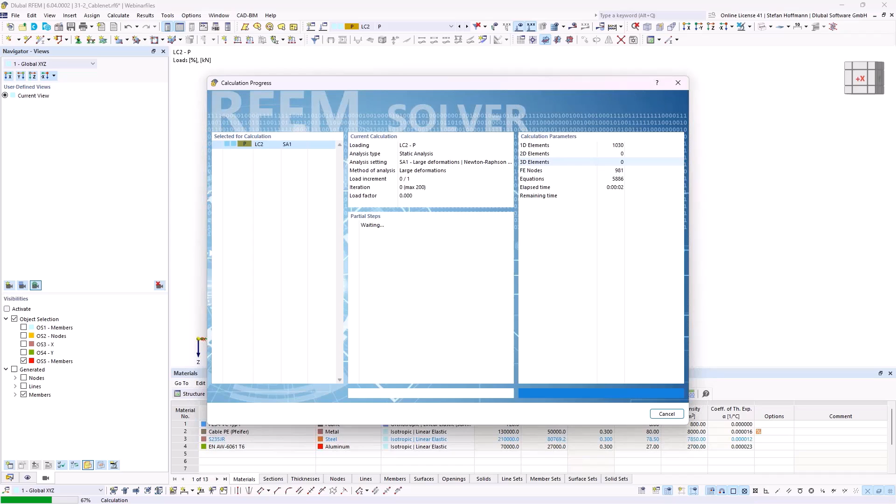So you can see we now have, with the 5 kilonewton in this direction, such a shape where we can quickly investigate the normal force distribution. We most likely reach 5 kilonewton in this direction and 1 in this, and all the others are identified by the geometric boundary. So if we would like to observe the deformation, we can check it like this, and best thing is to scale it for 1.

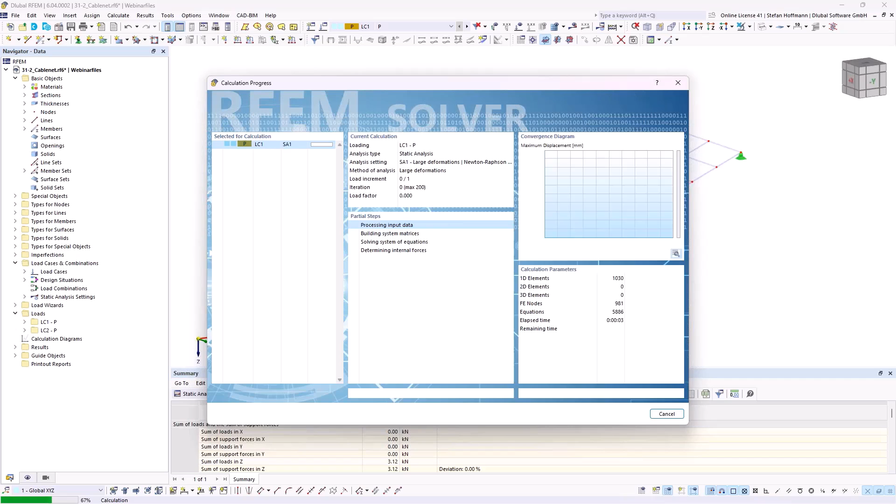And if we have a lower pre-stress, like 2 kilonewton into this direction, by pressing F5 on the keyboard, we can quickly run the calculation of the load case. We'll have a different, or a bit different, deformation, but the bigger difference can be found in the inner forces.

So last but not least, I would like to show you a last example: the modeling of a top ring of a tent. So I tried to investigate such a tent structure, quite easy, just a 5 meter circle, and at the top 1 meter with an inner column, to see what the influence of a ring may be. I think most likely it is often modeled like this, that you will have such a rigid cross and also a rigid circle at the top of your tent.

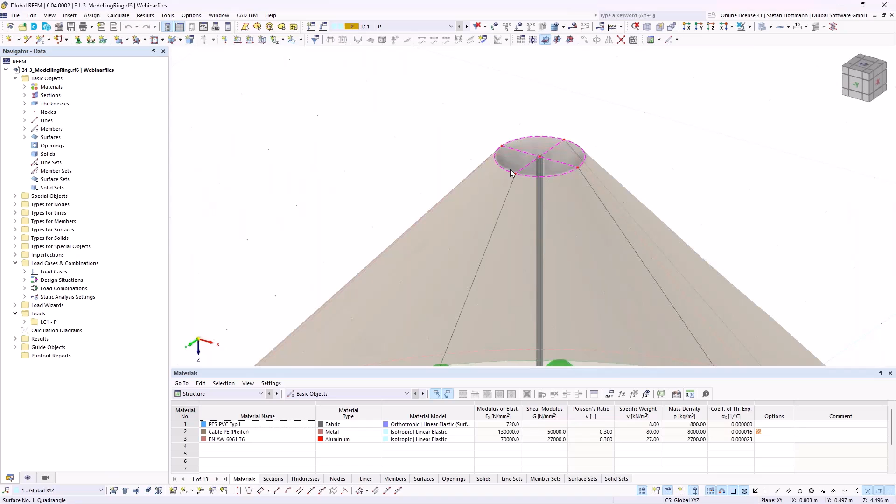The next option I can imagine is having a stiff surface at the top. And a third one I can imagine is having normal members at the top with their own stiffness. And if we now apply equivalent projection pre-stress on our structures, we go on and run the calculation.

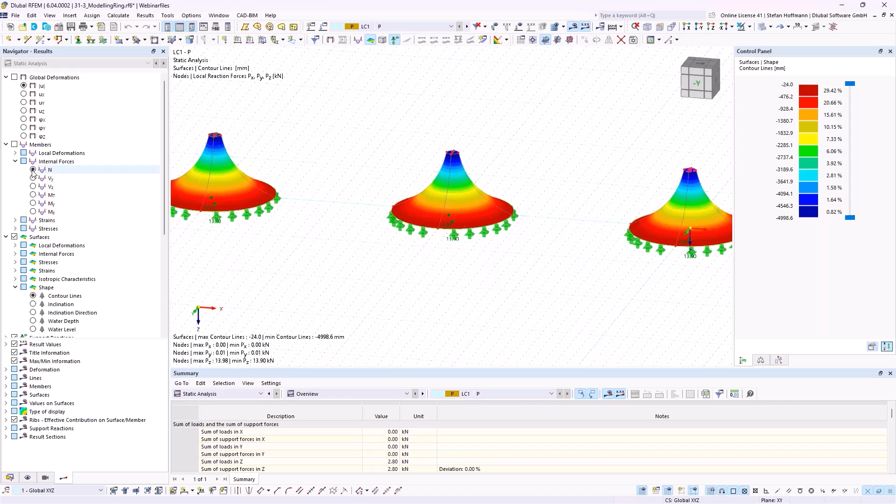Sometimes you need temporary supports depending on the numerical stability of your file. For this, we don't need them. We can see that the deformation should be similar, and also the inner forces should be similar. But then the member forces can, of course, differ from our rigid connection, and over here.

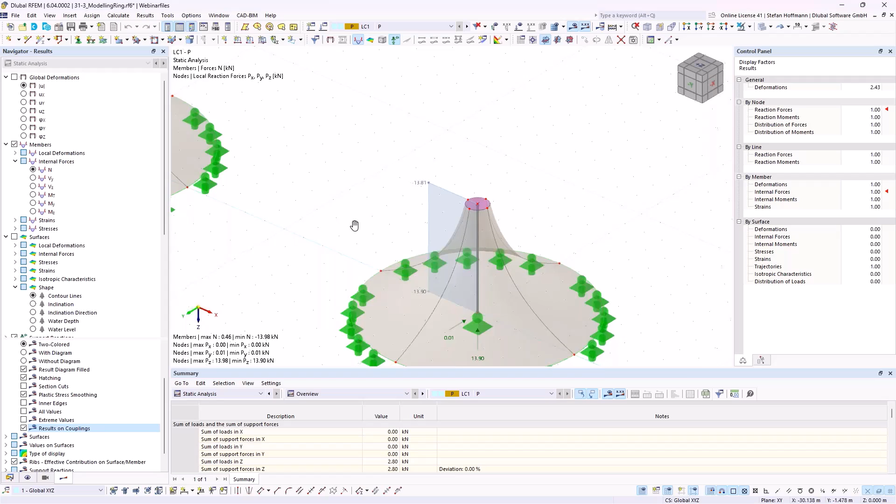So we have rigid members where you can, of course, display results on the couplings. Well, the surface will not give us any clue about the forces, so we are able to evaluate surface forces instead. Or we now check the member ring, where it will also most likely be influenced by the stiffness of the member. So depending on that, you can see that it will deform like this, maybe a bit exaggerated. It's only 6 millimeters, but it's not as stiff as the other constructions will be, and it has a small influence most likely on the inner surface distribution.

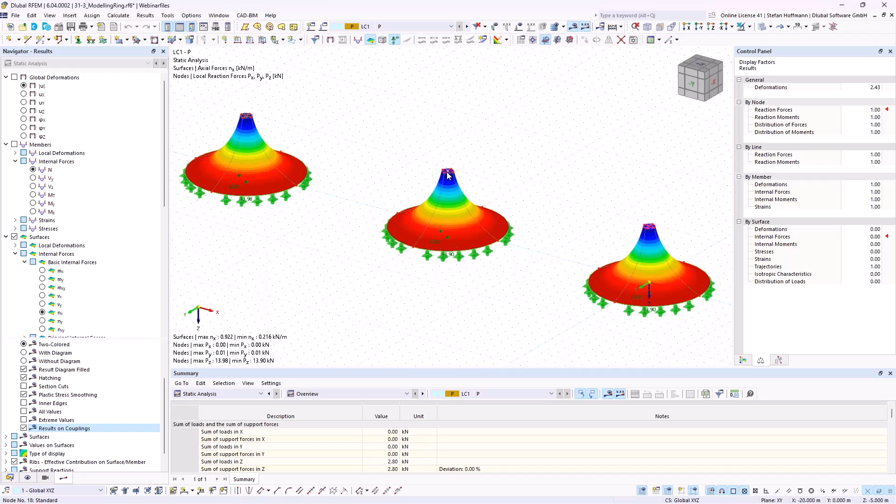So there's no big advantage you can achieve by doing one model or another. I think it's up to you what to choose for such a model.